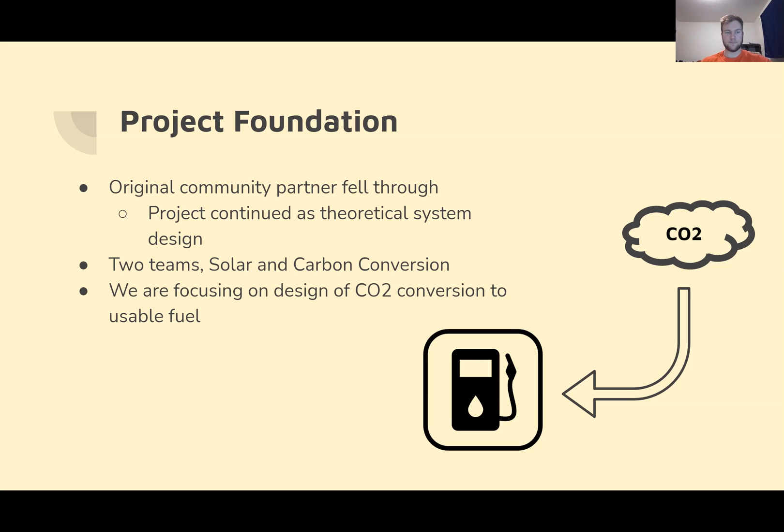Our problem statement. The burning of fossil fuels has put CO2 emissions past the absorbance capacity of the Earth, and there is a need for innovative, sustainable energy sources. Our team is addressing the problem of efficiently using a large remote plot of open desert land for a sustainable system converting atmospheric CO2 to a usable fuel.

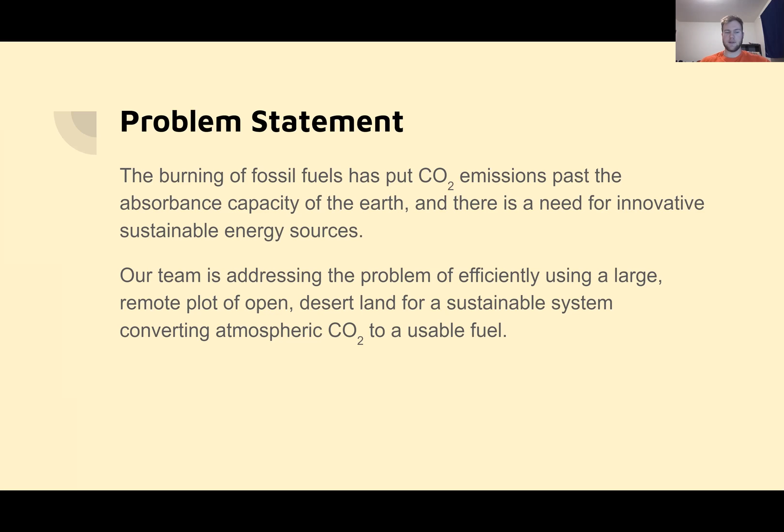And stakeholders. Right now, Joshua Lohman was the main person that worked with Abby to create this project. So I wouldn't say a main stakeholder, but he's the one that got it started, and he had the info and communications with the University of New South Wales. As of now, we're trying to look for businesses and consumers that would be interested in the end product that might help us along the way, or be interested once we have the project finished.

We're looking into Lightworks, which is an organization at ASU that works on a fuel, like not fuel, but is working to prevent carbon in the atmosphere. Kirk Thompson is another potential community partner that we have, and he has worked with Lightworks before.

And Klaus Lackner is a professor at ASU who created carbon trees, like artificial trees that can capture carbon from the atmosphere. And we have been in contact with him and are trying to work with him to further our project along.

Where are we? As of right now, we're between specification development and conceptual design. We finally decided on a singular fuel, which is dimethyl ether. So now we're working on creating an actual system to convert CO2 into dimethyl ether.

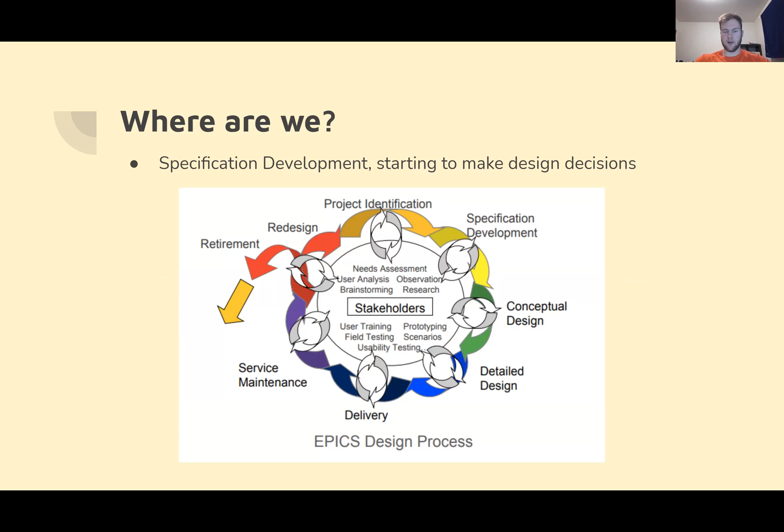And then carbon neutral energy, the process of capturing carbon from the atmosphere to recycle it into fuel. This creates a net impact of zero on the atmosphere and reduces global CO2 emissions. And our main goal as of right now is to create a carbon neutral fuel that's a repeatable fuel source so we can continue making it with no downsides on the environment and to reduce global warming overall.

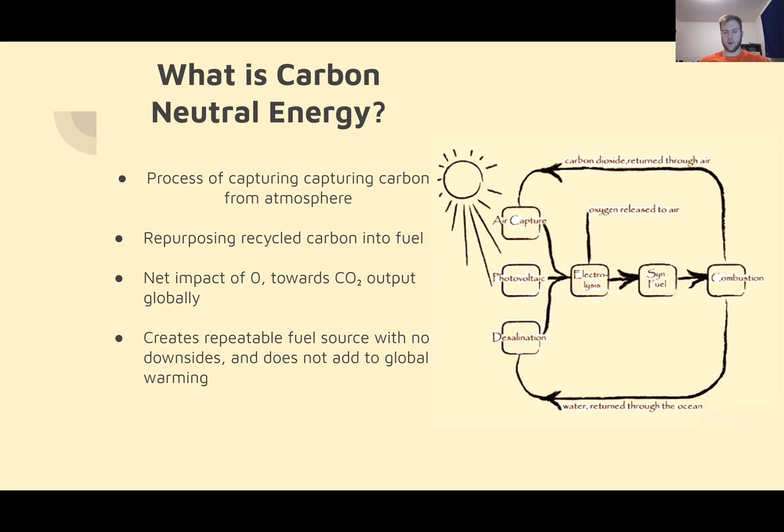As I said before, the artificial trees are what we are looking at intently to capture carbon. And Klaus Lackner at ASU prototyped them and has been using them. Right now they can remove about 100 tons per day of carbon, and they're very automated, so there's little hands-on maintenance. Right now the tower lifespan is 10 to 20 years and the filters last several years.

It does not come with a storage device, but there is a way with thermal reactors to get the CO2 out of them through using steam, and then it creates a highly dense CO2 solution that can be repurposed into pure CO2, and then we can use that to turn it into a fuel.

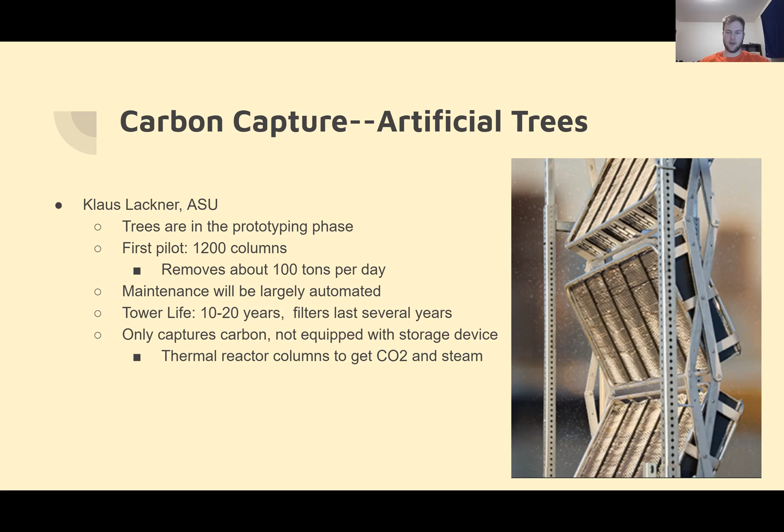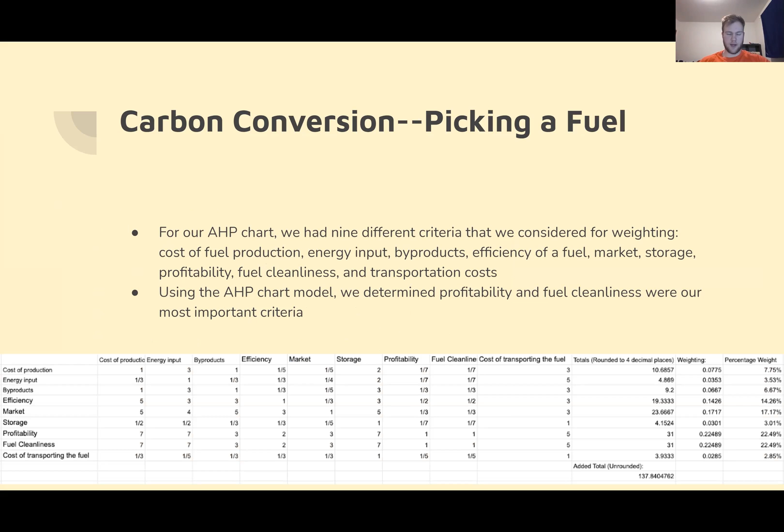On picking a fuel, we used an AHP chart, which had 9 different criteria that we considered for weighing: cost of fuel production, energy input, byproducts, efficiency of a fuel, market, storage, profitability, fuel cleanliness, and transportation costs. And using that model, we determined profitability and fuel cleanliness were the most important criteria. And this is the chart at the bottom of the screen. You can pause the video and look through it if you'd like more details.

And then deciding on a fuel, in the week before the last design review, we had four options that were our main options we were looking into, and we narrowed it down to dimethyl ether using this chart. As you can see, it scored highest out of all the other fuels.

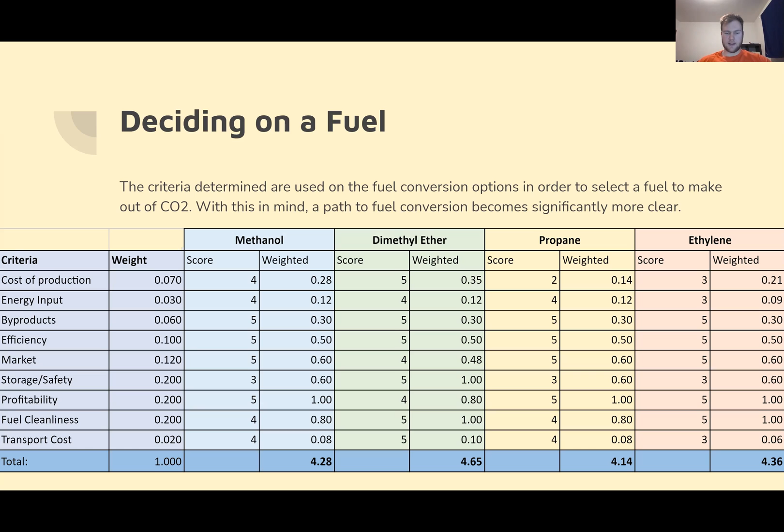And then our goal with captured carbon, our main goal is to convert it into a usable fuel that is carbon neutral. And dimethyl ether and methanol were the most sought after options we were looking for. And dimethyl ether is a safe option due to the corrosive nature of methanol. And we have found prior conversion paths of CO2 to dimethyl ether that currently exist and have been tested and tried. Dimethyl ether is clean burning and non-toxic, has a high cetane number, is a diesel alternative, or can be added to liquid propane gas.

And then methanol is a biofuel alternative for gasoline vehicles, can be made out of natural gas and is less flammable than gasoline. And the main downside with methanol is that you can't actually create it straight from CO2. It's a byproduct of other natural gases and, like, fracking byproduct.

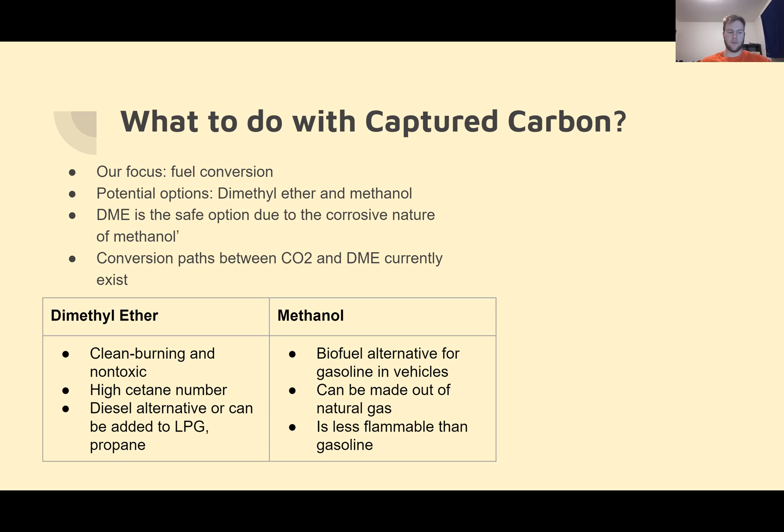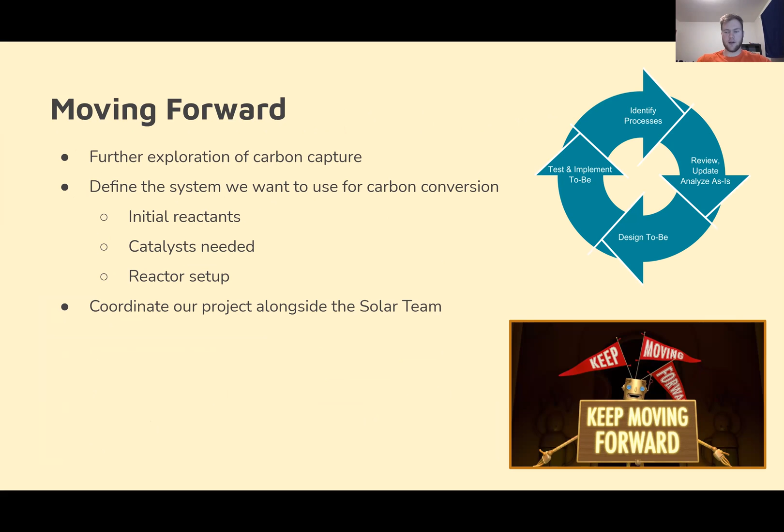And as of right now, we're further looking into carbon capture, and we wanted to define the systems to use to create an actual system for carbon conversion. We're looking at initial reactants, catalyst needed, and a whole reactor setup. And as of right now, we need to work with the solar team to see how far they are along and the amount of power that we can feasibly get to create a system.